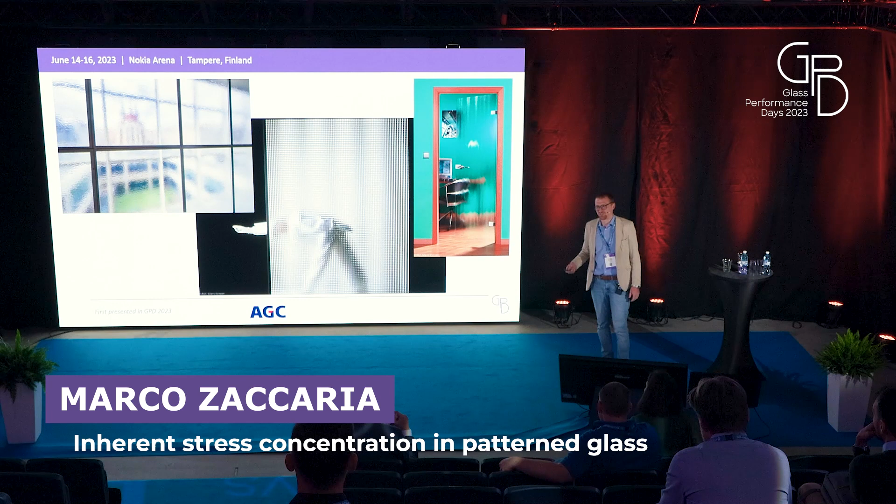Good morning, everyone. I hope you had a better night than mine. I guess I'm suffering a little bit of artificial jet lag or something. But I think the talk is kind of nice and relaxed with some formulas. So I'm gonna talk you through this.

It's about patterned glass. If you're here, probably you know what patterned glass is. But if not, patterned glass is basically what you see here. It's a type of glass that, due to the manufacturing process, the transparency tends to fade in favor of some privacy and to create some partitions or more creative spaces on the interior normally, but even for the exterior.

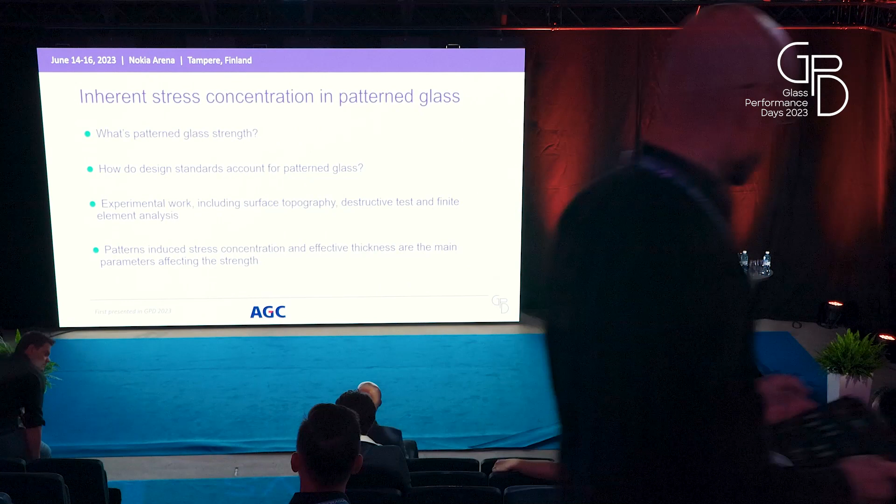So what the talk will be about is really trying to identify what's the strength of patterned glass, because historically it was found that despite being tested in the past, there were really no records to back up what's the strength of patterned glass. So we needed to do a little bit of a refresh at scientific and standardization level.

And so we had a look on how the design standards today account for patterned glass strength. And then we went into an experimental work which consisted of 3 parts. First, understanding what's the topography of patterned glass, so really what's the surface profile of this glass.

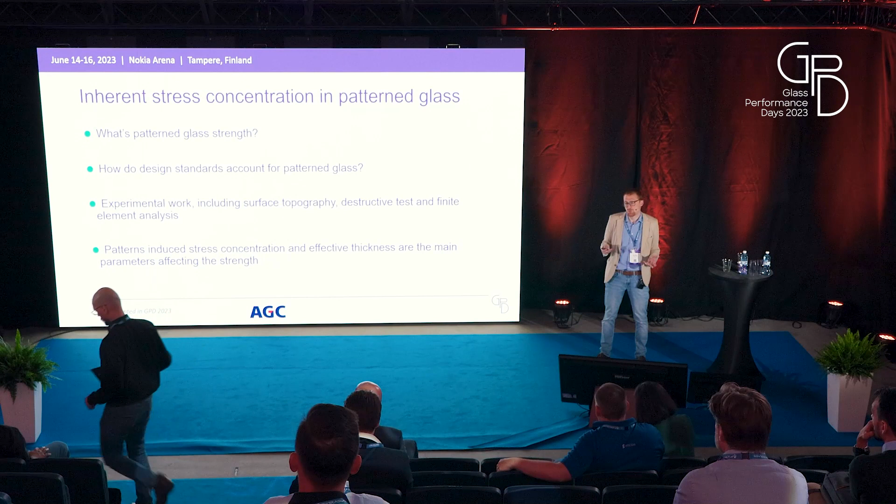And then we did clearly destructive tests from which we could gather the data that are needed for the standard. And then we went together with some finite element analysis to see how all the study could correlate, and so that our conclusion could be quite strong.

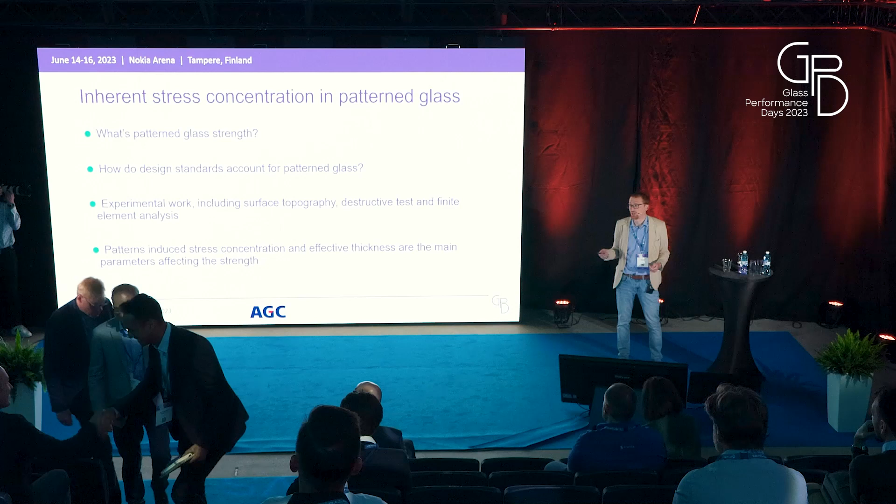And I can anticipate some conclusions here already, to put you in the mood, that the strength is highly affected by the stress concentration, which is induced by the geometry of the pattern. And then in second place, also, what is the effective thickness that is actually resisting the actions? So these are the 2 main parameters that affect that.

And I take the opportunity also to mention that this study that I'm presenting was a good collaboration with a colleague, Anna Shikinova, who is at the forefront of the standardization committee. She represents AGC when we go to the standardization committee, and with Professor Jens Nielsen, who was a professor at DTU in Denmark, and now he moved to new paths. So that was a really nice collaboration. At every step, there were inputs by the others.

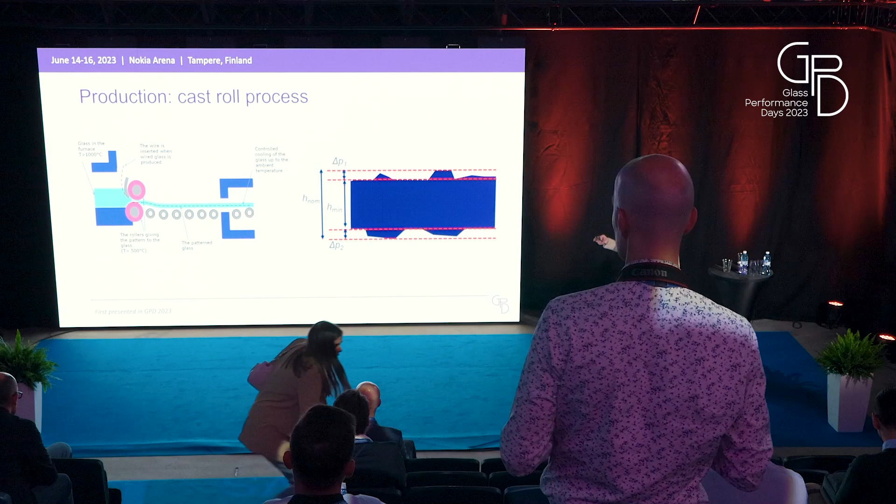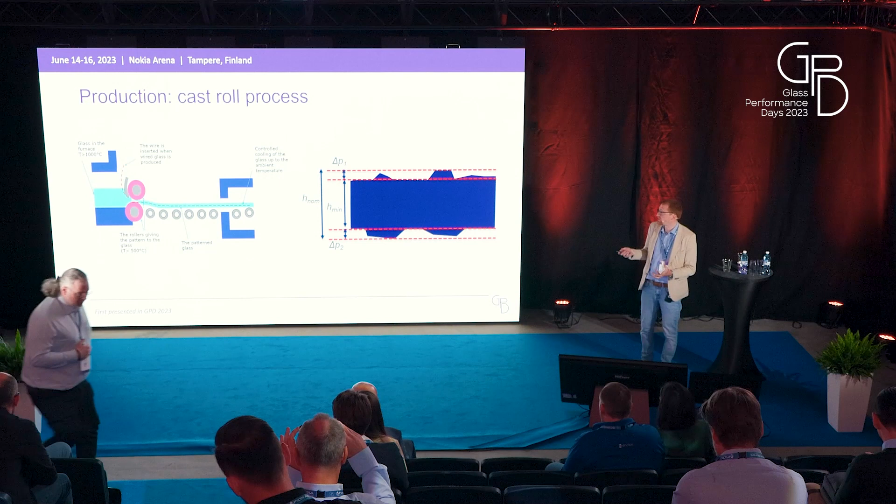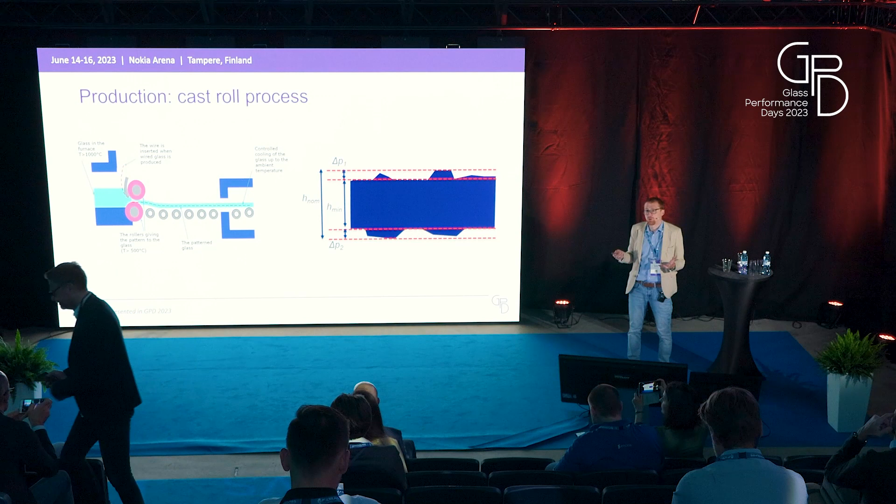How is patterned glass produced? Well, this is not float glass produced, it comes from the cast roll process. That means you've got the tank of melt material, and it gets kept at a temperature of about 1000 degrees, normally 1050 maybe, and then it gets squeezed between the rollers. Normally you might have both rollers with the cast imprint, so the imprinting could be on both sides, but more

regularly, the imprint is only on one side. And so after the cast, it's normally rolled up, and then we have the usual annealing process that is kind of common for all glass.

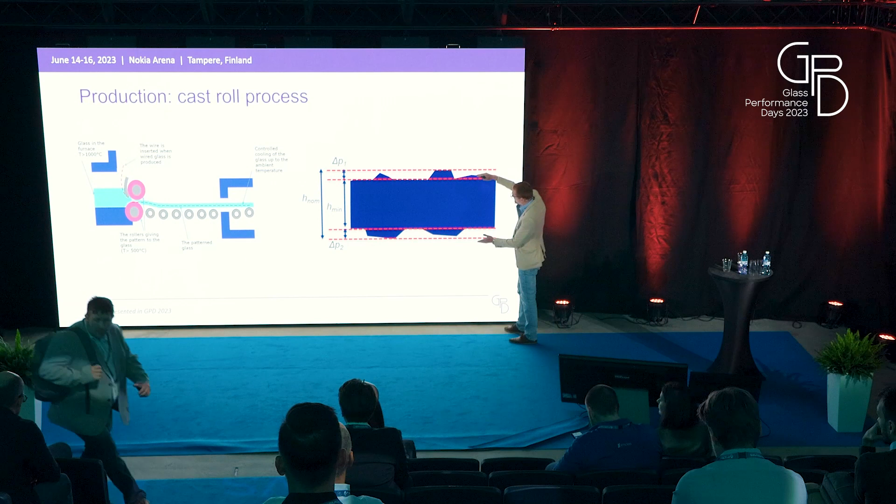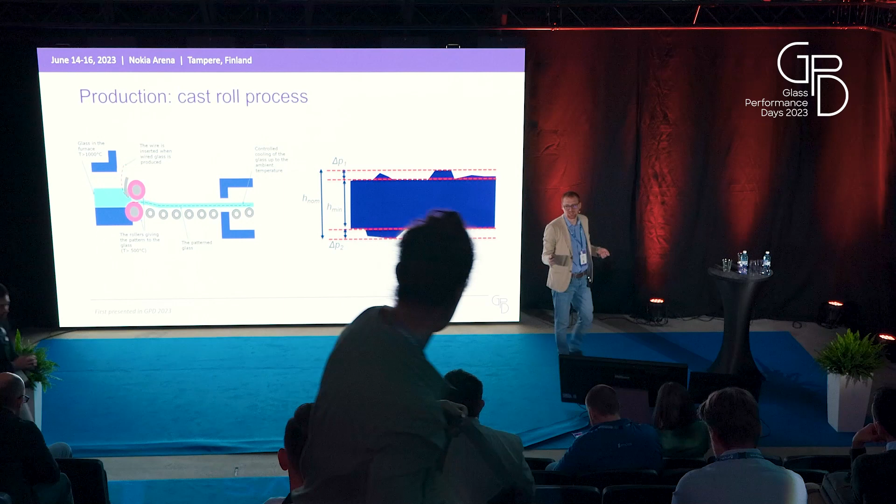So if you go here now on this general figure, that's something that could start to be interesting and relevant for what I'm going to discuss, because the question is: what is the thickness of patterned glass? If you go to the standard, it will tell us that the thickness is the maximum. With Anna, we were discussing, shall we call it nominal thickness? Is it maximum thickness? For simplicity, I call it nominal thickness, but what I mean here is really the peak-to-peak thickness that we are considering.

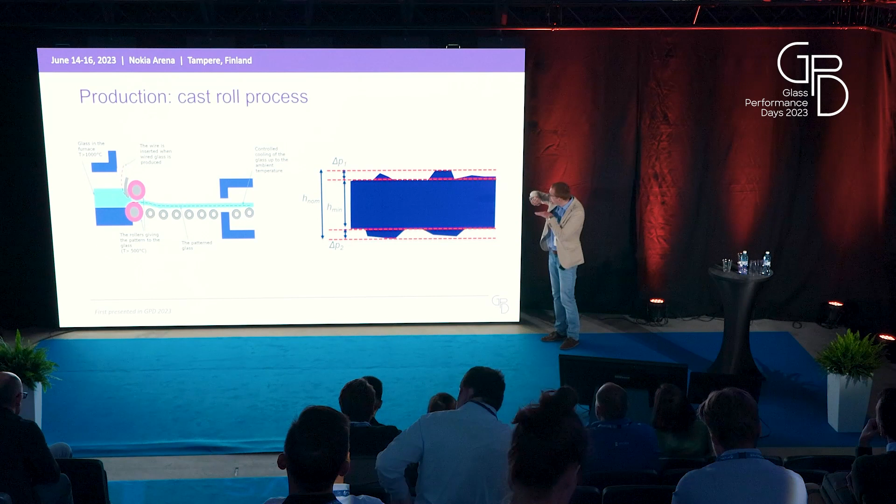And then there is also what I call the minimum thickness, which is if you take off all these pits and ridges of the glass, that's the minimum thickness. So we assume this was an ideally rectangular cross-section that will actually work.

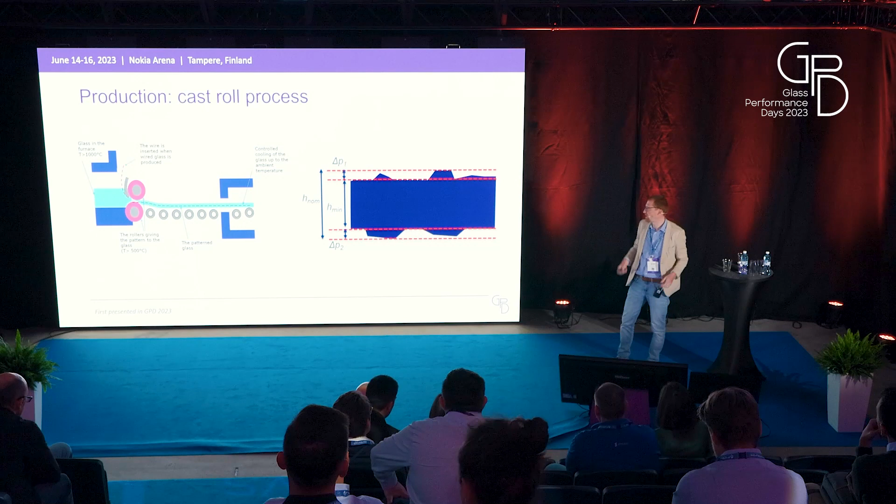So once we define this, let's have a look at the standard. These are the formulas, not that complicated, I'll guide you through. This is the EN 16612, but is also considered in the Eurocode, and that's where we think this work could actually start to take place.

Because when we have the characteristic bending stress of glass, which we know is around 45 megapascals, you have to use some factors to go from the characteristic to the design strength. If you see this factor here, the KSP, that is called the surface profile factor. What does it mean? That depending on how the surface is on your glass, you have to apply a factor to take into account these surface changes.

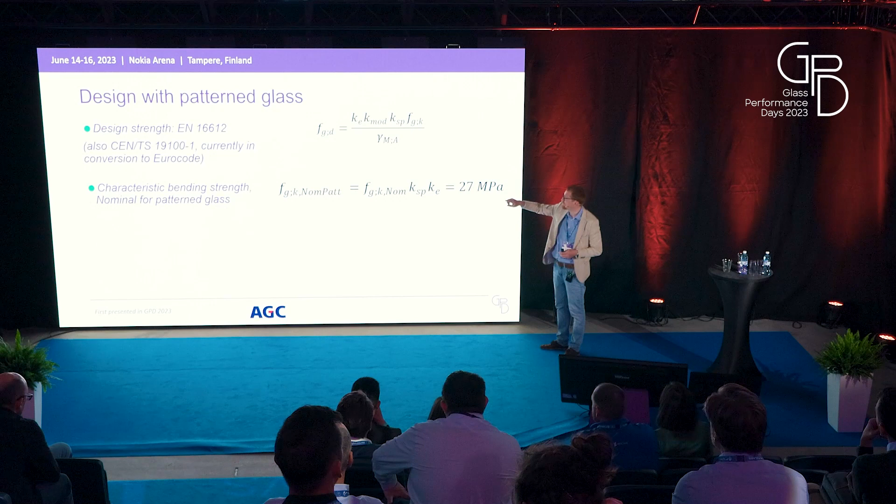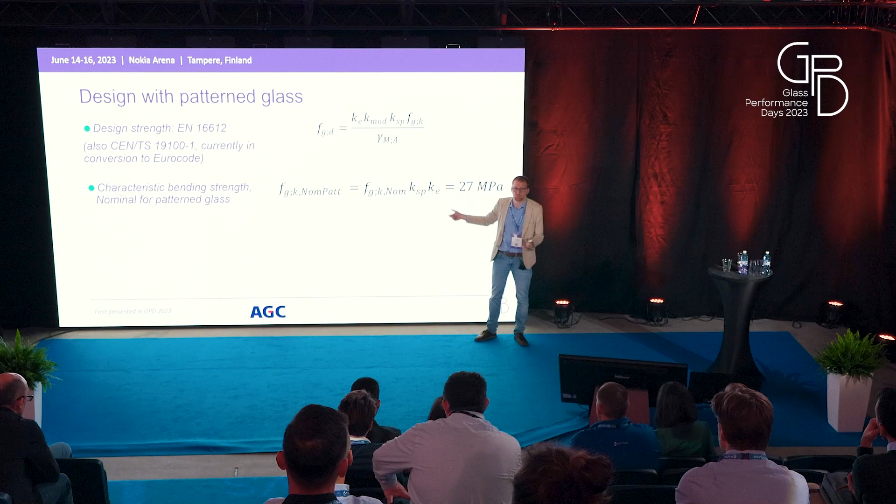If we consider pattern glass, we could say that taking only those three elements - characteristic bending strength FGK, then KSP, and KE which is the edge factor - we would be able to define the nominal strength of pattern glass. So the equivalent of 45 megapascal for float glass, for pattern glass we get to the value of 27. Why? Because the standard tells us this is 0.75, and if we are considering an as-cut edge, which is what we did in this study, this will be 0.8. So just some maths gives you the 27.

And so I showed you before how the pattern changes, and the surface profile is only one value, 0.75, and that's probably where one of the problems is. So in the study, we had to test the glass and verify that whatever we tested had to be higher than this value, because if it was lower, it means that when we calculate the stresses for the standard, we are not within the safety conditions.

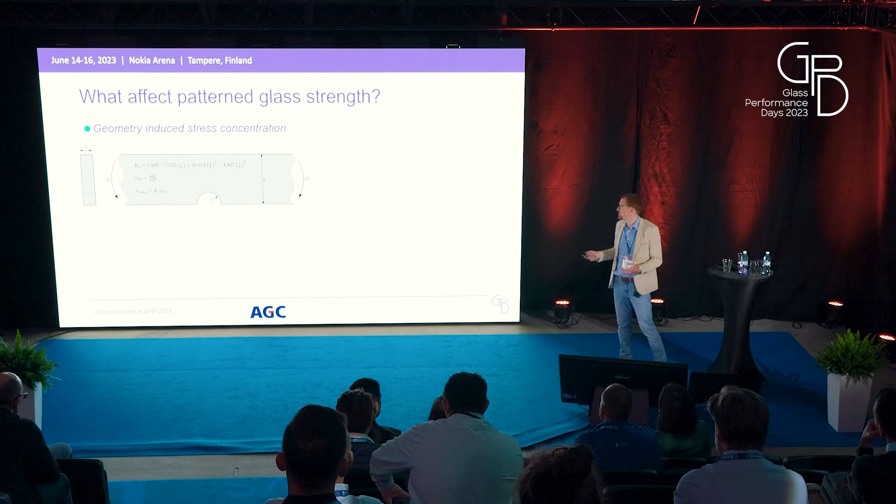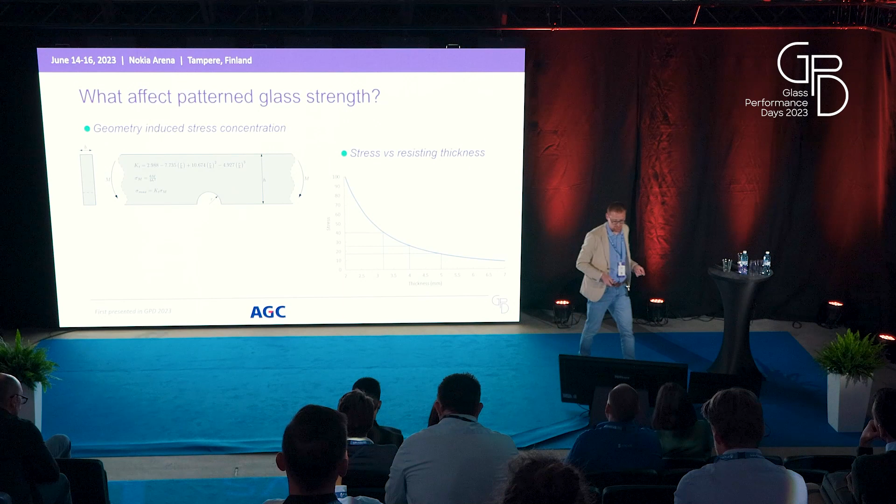With this kind of hints in mind and things we wanted to address, we started the study. It's organized into doing surface topography, really trying to measure what the patterns look like so we can model it for finite element analysis. Then destructive testing, done according to EN 1288, using 1.1 meter panels. In our case, we test pushing upwards to rule out the self-weight of the glass. And then finite element analysis that will reveal where the stress concentrations are.

The study was done on 4 commercially available patterns, the ones I showed in the earlier pictures, and the test method was not consistent for all 4 series. The ones where we went up to finite element analysis are only the Flute and the Raywall, simply because these are monodirectional, so easier to model and easier to get conclusions out of.

For the Crepi, we didn't do the finite element analysis, but we tested with the pattern in tension. And with the Niagara, we also pushed a bit further - testing as-cut and ground edges, and testing with the pattern in tension and in compression.

Today I will not show you all these results because it would probably drive you away from the real topic. But there is the paper, for those who are interested - hopefully it gets accepted and published. I submitted it to the Glass Structures and Engineering Journal, so at some point it might be published there, and the full data will be available.

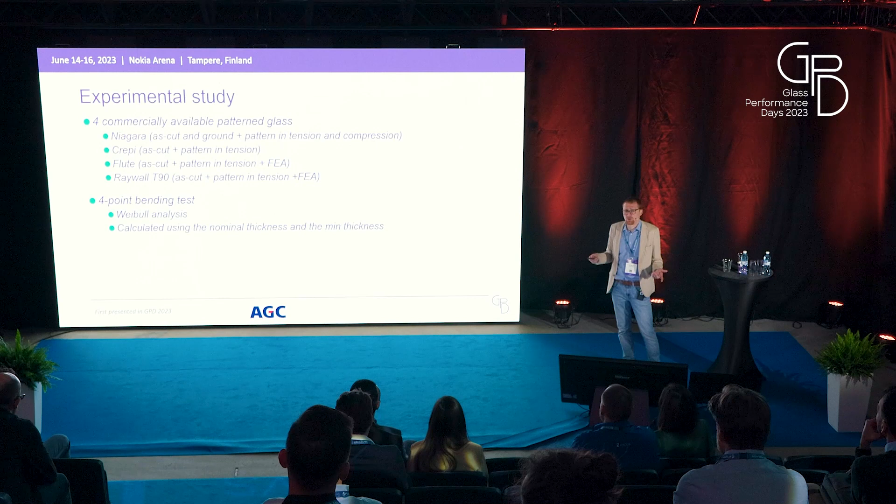After doing the 4-point bending, we've done the Weibull analysis, and in this Weibull analysis, the calculation was done using the nominal thickness, as the current standard tells us, but also seeing what happens if we calculate according to the minimum thickness.

The finite element analysis was made taking 2D plane stress, parametrically varying the thickness from 3 to 9 millimeters, and triangular elements with second order displacements were considered.

There's a big table which I won't show in detail here but will focus on later. Let me tell you the relevant parameters: the Weibull theta, the 63% value which is kind of the average, then the slope of the best fit line, the goodness of fit, and a characteristic bending failure.

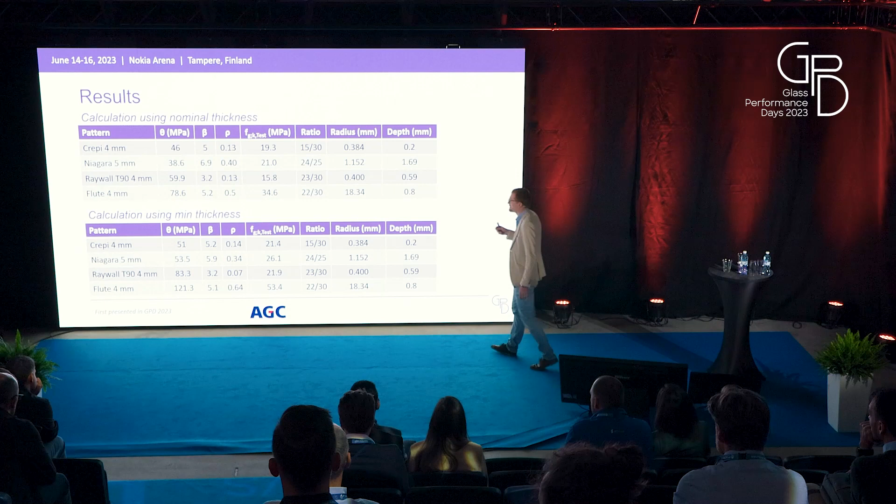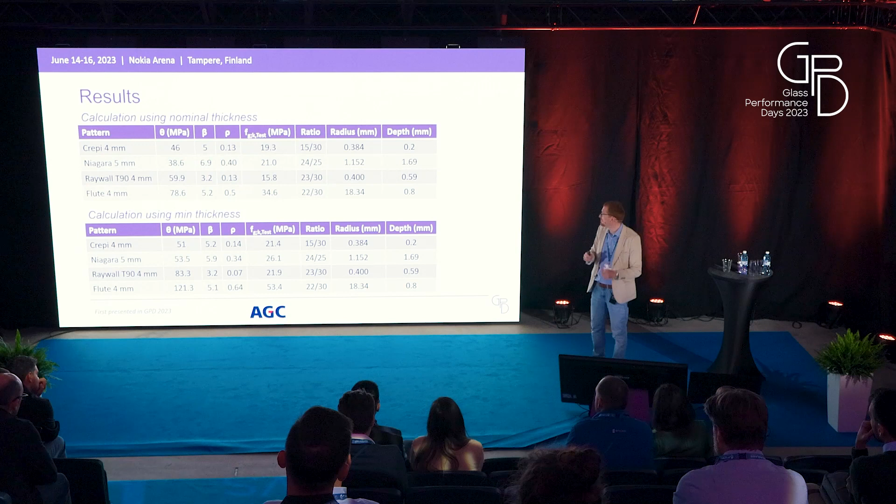This is also important for us to address the data, which is the ratio: how many samples out of the batch we tested are valid data, meaning they either failed within the loading ring or can be considered a valid value. Then there's the radius of curvature, coming from the topography of the pattern, the minimum, and the depth of the pattern. Calculation was done twice because we were using nominal thickness and minimum thickness.

So now I'm going to zoom in on some of this data. We had 27 megapascals as our nominal value in the first place. How do the tests compare with that 27? We want to satisfy this equation, and for 3 patterns we couldn't satisfy it. Only the Flute pattern was doing well.

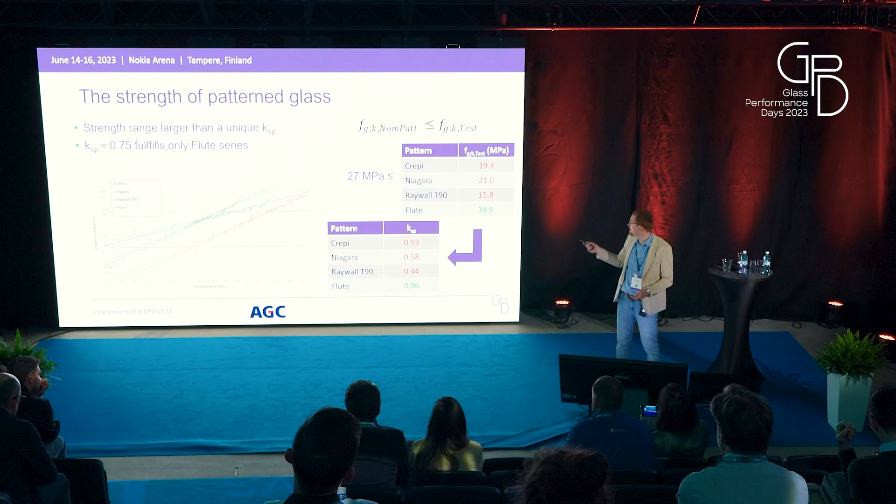So what are the conclusions? The KSP, which will be here, varies much more than 0.75. So this value of 0.75 maybe could be an average out of there or something similar. I didn't work out the average, but clearly it's not representative of what's actually going on, and only the Flute series actually fulfills that.

And then you see a little bit of the Weibull plot and how it works, how the data points distribute along the best fit line.

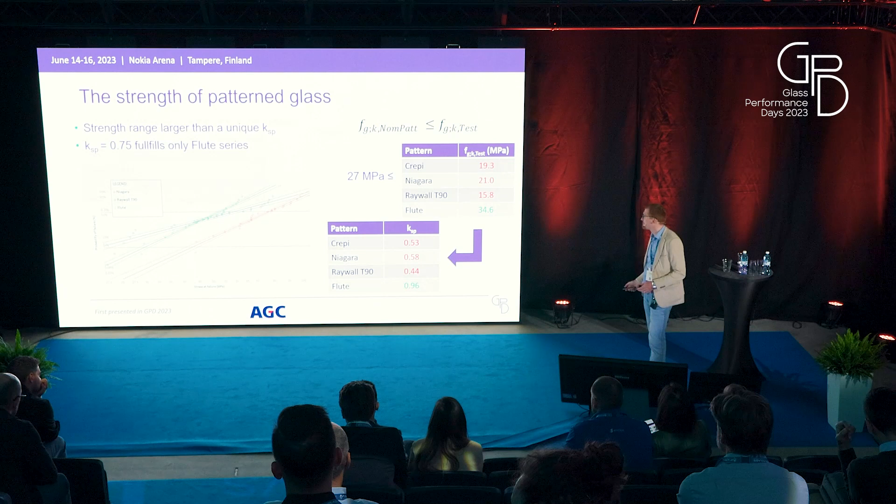So let's try to understand a little more what's actually going on. If we take the Raywall T90 pattern, the area of stress concentration is very limited on the pattern itself. Fractography done afterward showed that 77% of the failures started from that point, so it's really the stress concentration playing a role there. As a matter of fact, the Raywall T90 is probably the weakest, and its radius is one of the lowest.

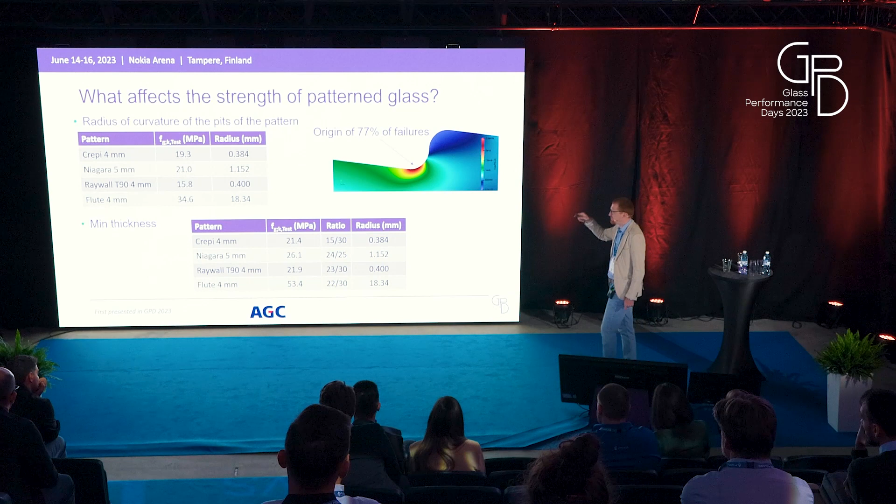If we do the calculation according to the nominal thickness, there is also a tendency here. If we compare the radius of curvature, those with a very low value - these two, for example - have a strength of 16 and almost 19, so they're similar. Then as the radius increases, the strength also increases. This radius is very large - it's like almost 2 orders of magnitude higher, versus 1 order of magnitude higher than that.

So this feels very close to standard glass, or that 0.75 can work, but these others we are out. So clearly we can say that the radius of curvature of the pattern is what's playing most of the role. But is it the only one?

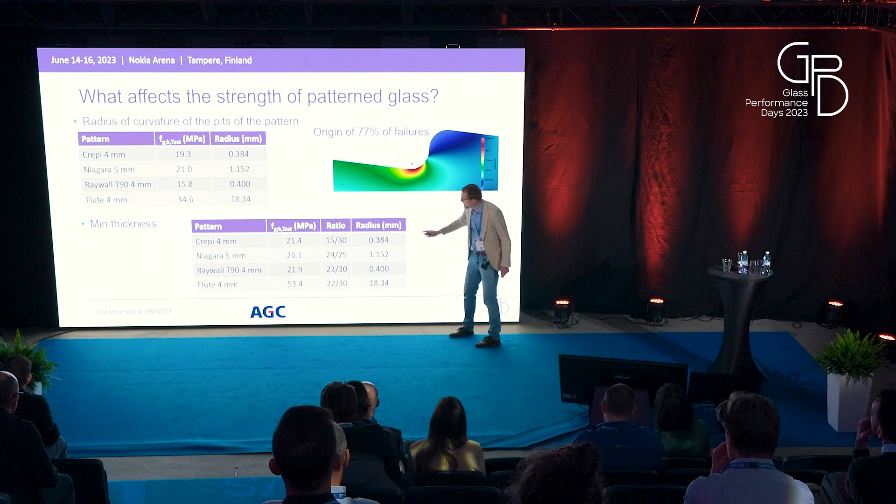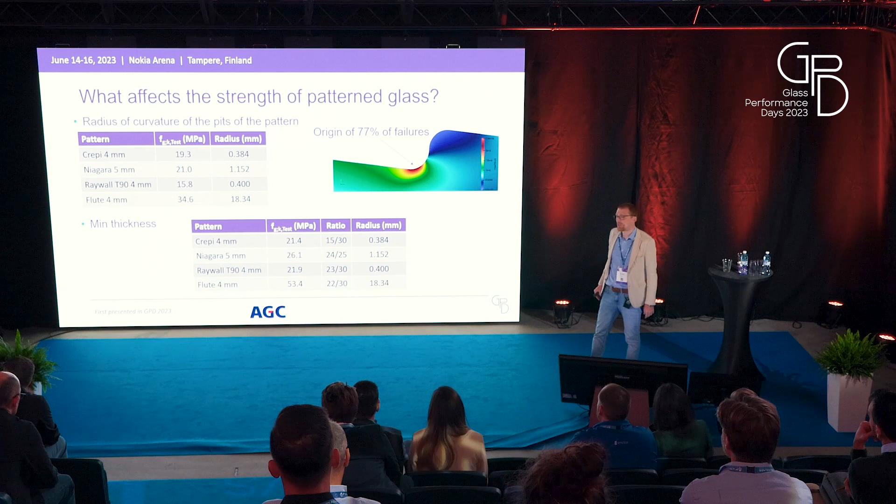Let's look at calculating the minimum thickness. For me, the focus should really be on these two here, the Crepi and the Raywall T90. What happens? Allow me, engineering-wise, that 0.38 and 0.4 is the same value, or very similar, right? You see now that the data were a little further apart when we were considering the nominal thickness, but when we consider the effective thickness, the data tend to get a little closer. So in a way, even the minimum thickness is playing a role there, and this should be taken into account.

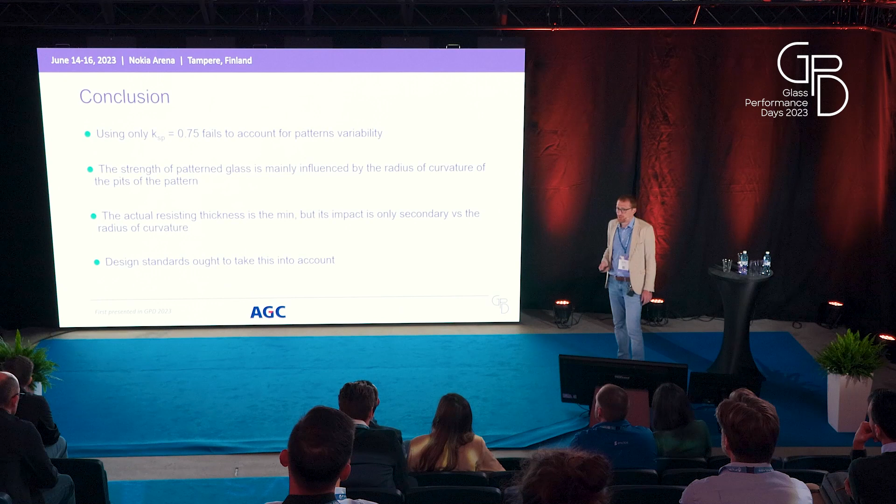Now, up to which point does this have to be taken into account? Let's see the conclusion. The 0.75 fails to account for the variability of all the commercially available patterned glass, so this is something the standard should probably take into account to address. We know that the strength is influenced mainly by the radius of curvature of the pits of the pattern - that's very clear from this study. And also the effective resisting thickness is playing a role.

Now, given this job is serving standards, up to which point is this second conclusion important? I think standardization also has a role to simplify the work of the specifiers. So maybe the secondary effect is something that could be embedded into safety factors and other factors somewhere. So where the work has to be done and addressed is really on this first part.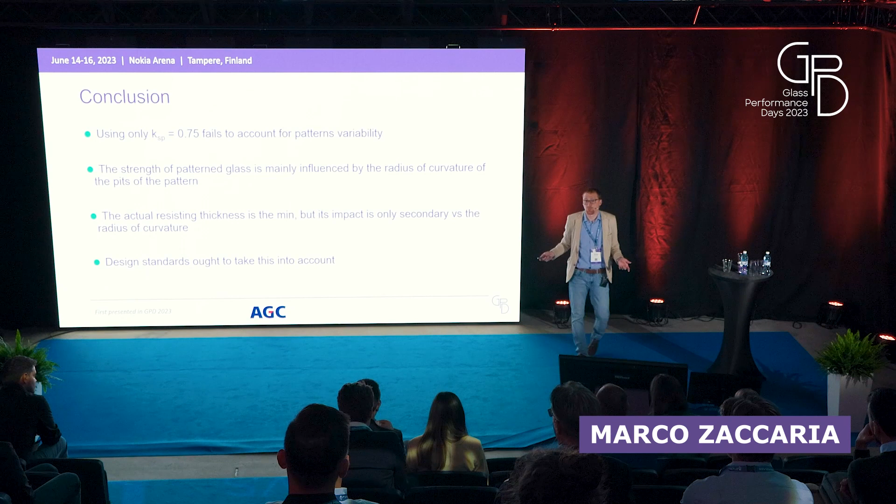After this study, we hope this will serve the scientific community as well as the standardization community to take this into account and adjust or direct the new glass Eurocode, which will come into place shortly and will be complete with this part.